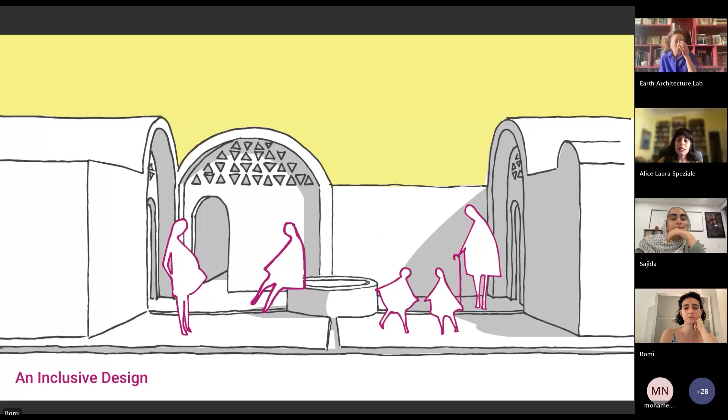Our project aims to offer a solution that allows an emergency settlement to evolve into a long-term one while ensuring respect for human dignity, cultural needs, and hygienic and sanitary conditions. Next. So, as I was saying, in our project, we are going to focus on construction and building material, earth and environment, and respect for social and cultural dimension.

So to develop our project, we started analyzing the previous proposal to try to understand how we could improve this project. So one of the main issues that we identified was the rigidity of the housing grid. And this kind of layout creates a monotonous, impersonal, and repetitive environment, which can negatively affect the residents' sense of belonging to the place. Next.

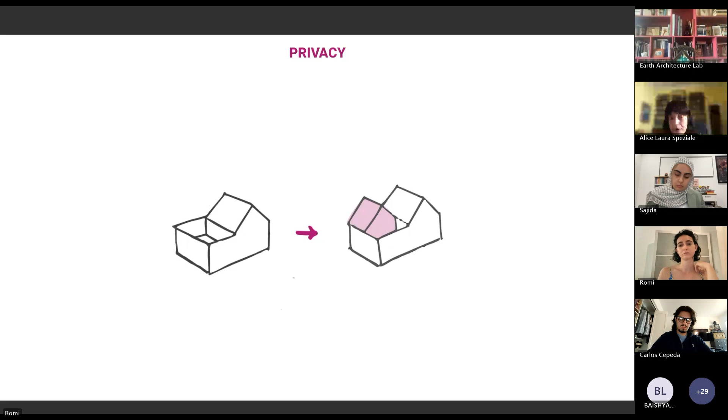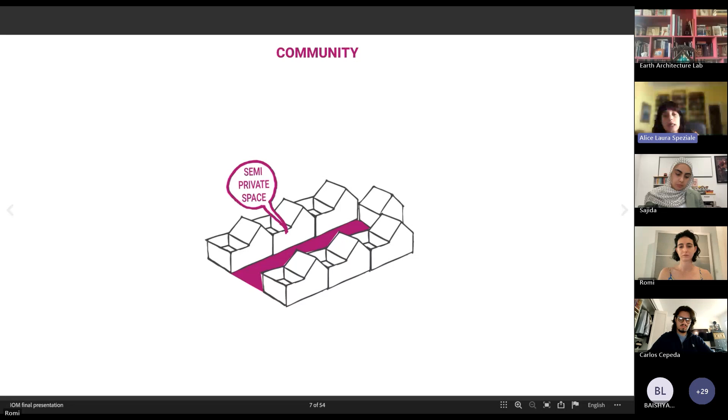Next. Also, we designed some semi-private space in which people can start to get to know each other and build up a familiar environment, which is going to be shared among a couple of shelters. Next, please. So these are the main features of our design. We are using dry toilets, a simple and feasible water drainage, a shared wall construction.

Even though last time someone of you said that many people don't like to share walls, we want to point out that these adobe walls are about 60 to 70 centimeters thick, so they will ensure enough privacy within the shelter.

Then we are designing a safe space for women, children, and elderly, encouraging rainwater harvesting. We are recycling the grey water, designing outdoor space, and also, as we will see in the master plan, we are designing some areas for facilities and social and cultural space.

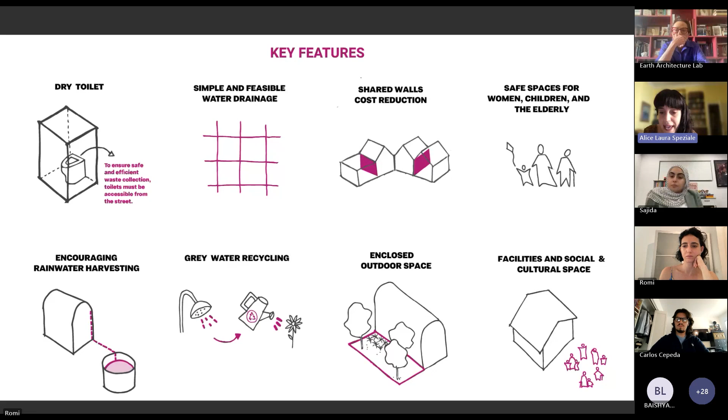For the material, we are using adobe, arch and vault. This technique doesn't require the use of wood, and also they are costless, fire resistant, and sustainable. And then we are using lime to ensure the durability of the adobe construction. So we want also to focus on training. For us, this is a very important part of the project.

We want to build with the community for several reasons. The first one is to introduce a sustainable practice in Somalia because there are too many buildings made out of concrete or CGI shelters, and also because we can empower the future inhabitants to build their own home and also create new job opportunities.

So the training part is going to be divided in several steps. The first step will be a community meeting, to explain the project to the people and also to build initial trust. The second is going to be the Dolow earth lab, in which the inhabitants are going to start to create the adobe bricks, because we know that they need some weeks to dry, and this ensures that the people get to know the construction process and know how to replicate it.

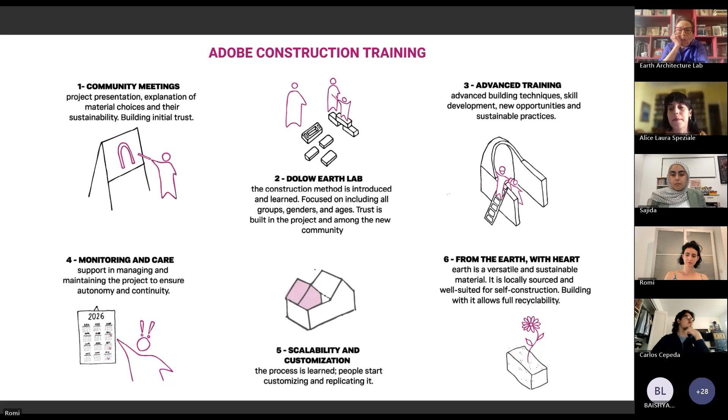So yeah, I'll continue from here. This is the shelter. It's built in a vault, like we said.

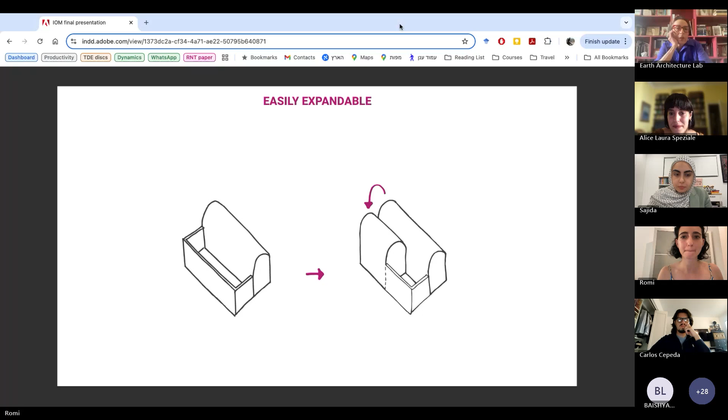Romi, can you hear me? No. Can you hear okay? No. You can try joining on your phone and just use your phone as a microphone. You really can't hear? It's very muted. Try the volume. Go with your telephone, as Saj is saying. Yeah, I'm gonna try to connect with my phone. It's gonna take just a second. I apologize for the delays. Okay, maybe while you are doing that, I can continue. I can hear you better. You can hear now? Okay, let's give it a try. Stop me if you can't hear. I'll try to speak loud also.

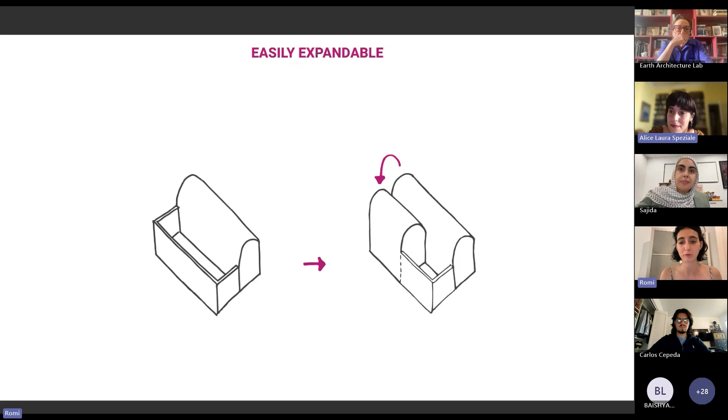Thank you. This is a basic shelter unit. It's based on the vault, like we mentioned before, with an enclosed outdoor space, which can be used as a wall base to add an additional vault whenever they want to expand the building. The vaults or the shelters are organized like this to collect rainwater from the roofs into a cistern in a shared courtyard, which is drained out into the streets in case of an overflow.

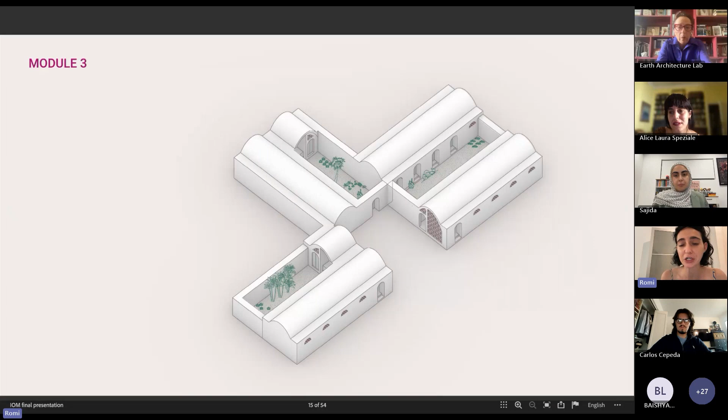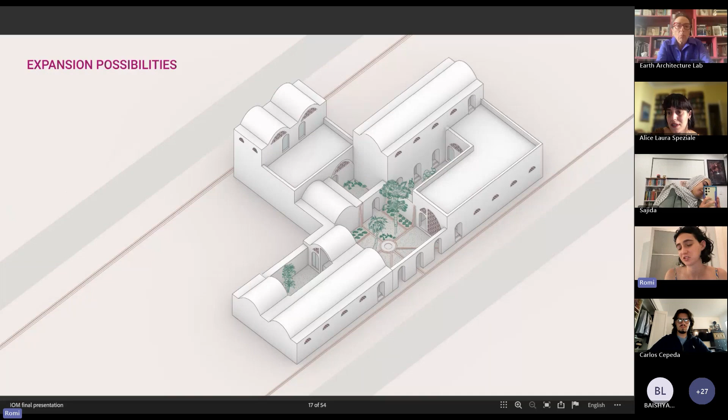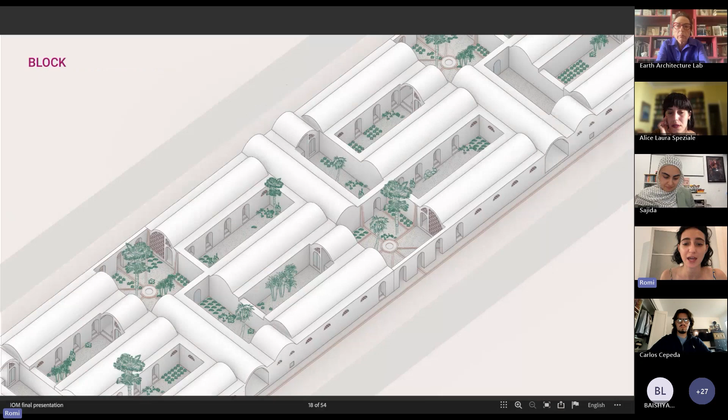Yeah, the module looks like this. 1, 2, and 3, which is a slightly bigger shelter for bigger families. They have a shared courtyard in the middle for the 3 of them, and they have their own private courtyards and their rainwater harvesting. This is just an example of expansion possibilities, how they can still keep their courtyard and add a second level or another vault, or however they choose to expand. And this is what it looks like as a block of a few clusters together.

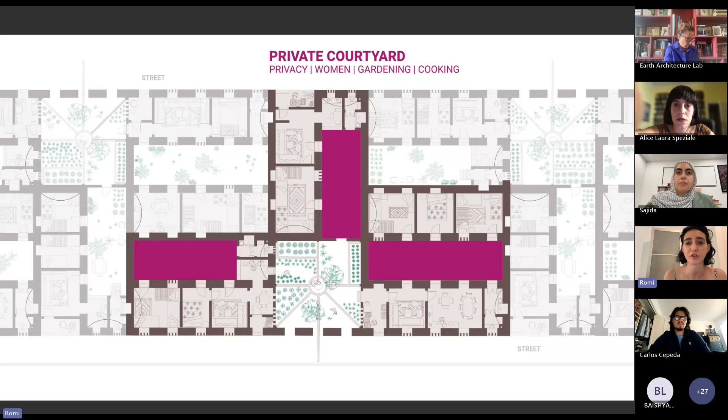The private courtyards, which they each have for themselves, are the more private spaces, more to be used by women for gardening, for cooking. And they all also have a front porch that is accessible from the main street. This porch is suitable more for the use of the men and is a potential place to start a home business that's accessible from the street.

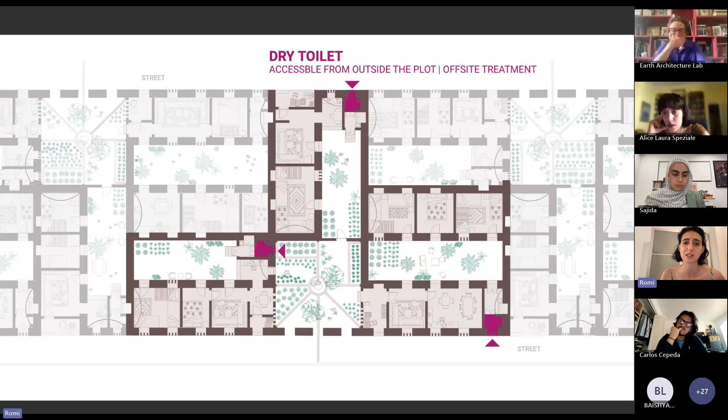Also, they all have dry toilets, which open towards the outside of the plot to allow collection of the waste and off-site treatment, so they can just come and collect it without entering the premises of the house. So there is just a small opening to the back. You'll see it later.

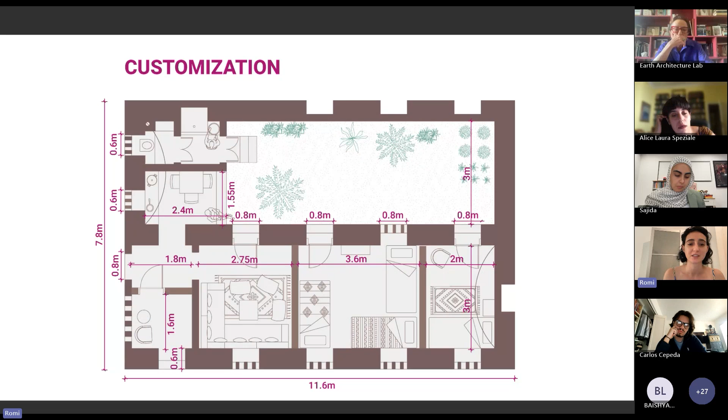The gender segregation here is also taken into consideration, where the front porch is more for the men that go in from the street. They enter the house. They usually use the main living room and maybe one of the bedrooms. And the women can go in from a separate entrance through the shared courtyard directly into the kitchen, into the closed private courtyard, and to another bedroom that's separated.

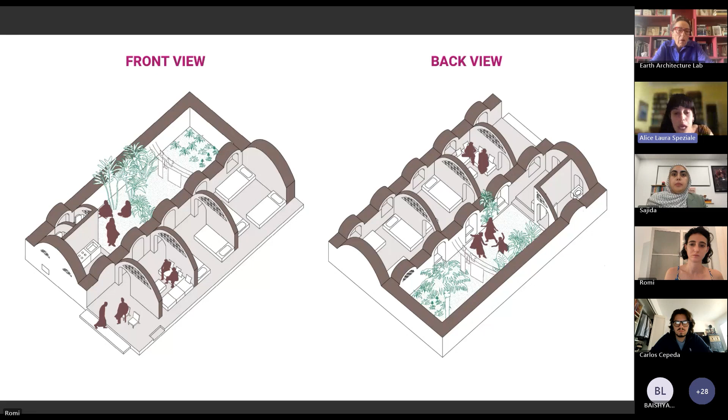Here, as you can see, the kitchen is going to be open toward the outside, and is going to be surrounded by a vault. This for us was very important because the adobe, as we already said, is fireproof, and this is very important. And also we are showing a bit of the use of the courtyard that can be used for farming, for instance.

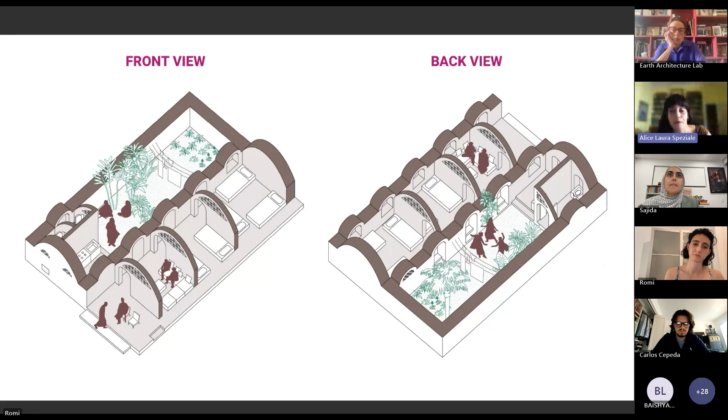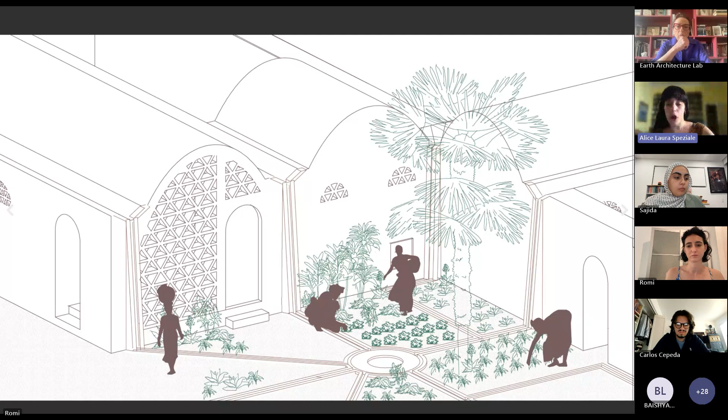Next. Also this is a view of the shared courtyard. As we can see here, this is just a proposal in how they can use this space. This courtyard is going to be shared by 3 families. So according to their needs, they can use it for farming, to have a playground or sitting areas.

Then we have this line of the rainwater collection, which is somehow dividing the space that belongs to every shelter, let's say. So there is not going to be fighting among the people, and they know more or less which space in the courtyard they have. This is just an overall view. This is going to be for us like a safe space for women. As we said before, the front porch, you can move to the other one.

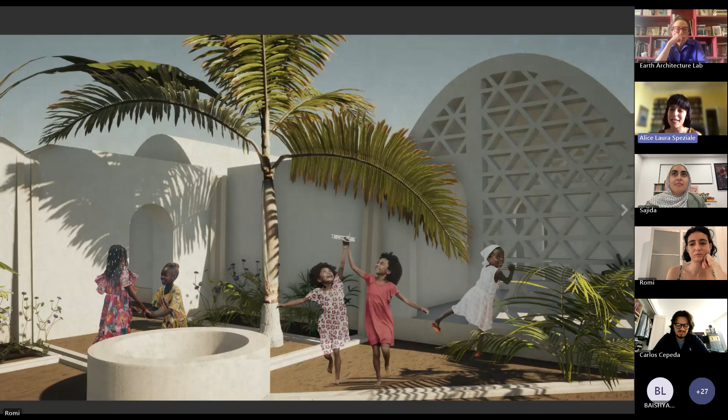Okay, the courtyard is going to be also like a safe space for kids, but not just for kids. We have also thought about people with less mobility, as people in wheelchairs, and also old people who maybe cannot walk to the main facilities, and they need a space where to socialize. And also here, the kids can play freely without the family taking care of them, let's say.

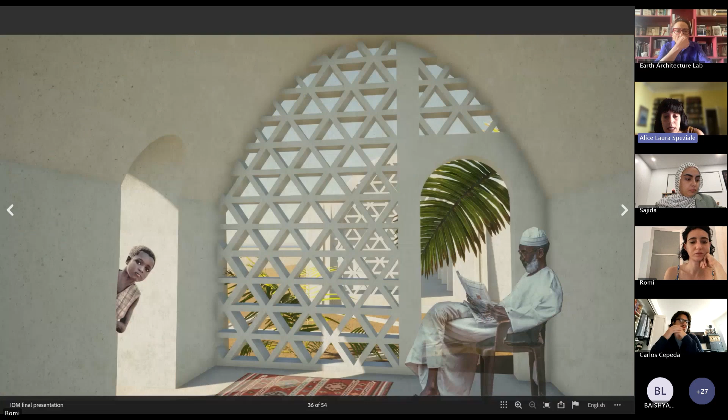Next. This is a view of the front porch. As we said, it is more related to the man, but just in the case in which the man wants to open a small retail shop, because the front porch is going to be connected to the main living room. And as we know, culturally, the living room is used by the man whenever they have men visitors. You can go next.

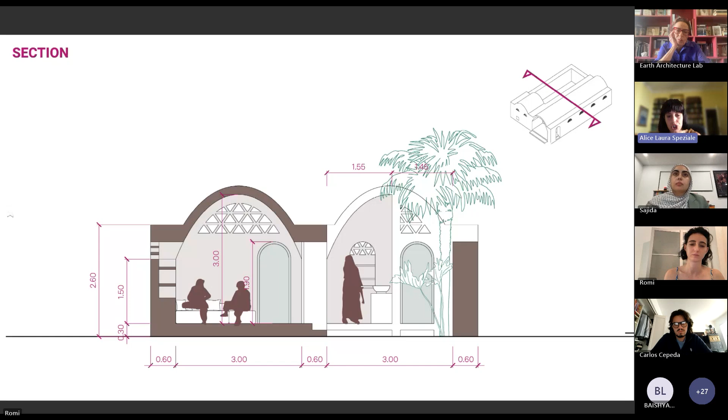Can you hear me okay? Yeah. Okay, if it's not, then tell me, and then you can just take over.

And then we found a reference of an association called La Voûte Nubienne. It is a French association which builds these Nubian vaults from mud bricks across different places in Africa. They start from the teaching and making itself, and then construction to the finalized building. We're taking as a reference some of their technical details. So for example, the mud brick itself and the sizes, which are easy to use.

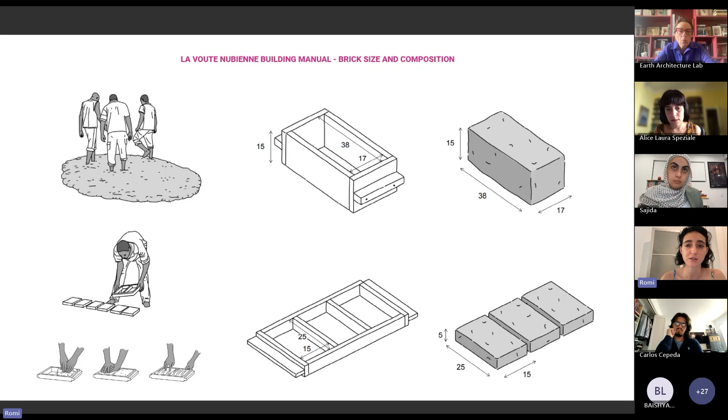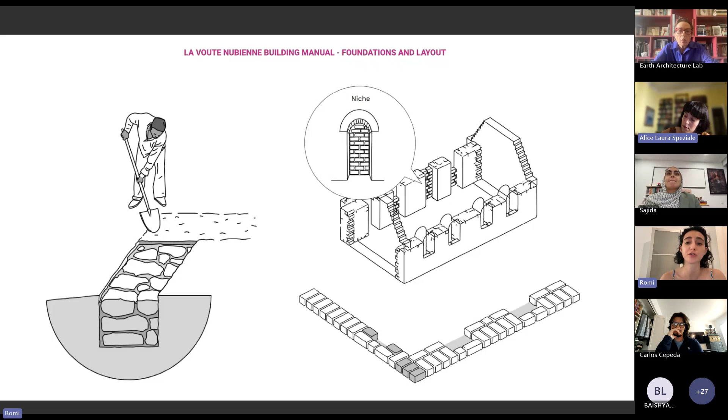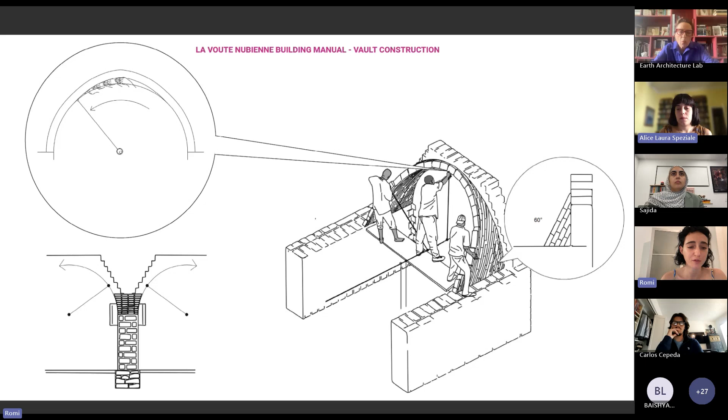Yeah, materials. I would just like to say that we introduced this NGO because we use some of their details, especially for the niche, and just for this reason. And okay, this is a section where we are showing the materials. So we have sun-dried mud bricks, which are bigger for the walls, and then smaller ones that are used for the vault.

So adobe bricks: we decided to use this material because it can guarantee a fresh environment within the shelter, and also because, as we said, it's sustainable, and so it keeps the inside fresh. We also designed some openings which allow cross ventilation, but also the warm air to go outside. To ensure the durability of the adobe construction, we use lime damp proofing for plastering the outside. And also we decided to raise up the shelter.

So we have a linear foundation made out of stones and a mortar of lime. Underneath it, there is a drainage layer made out of gravel. And for what concerns the floor, we also raised the floor. We use 10 centimeters of crushed glass, which can be used as a drainage layer. We didn't use it also for the foundation because it's less stable, and we thought that gravel is better for the foundation, but for the flooring it's okay. And then we have a slab of lime mortar.

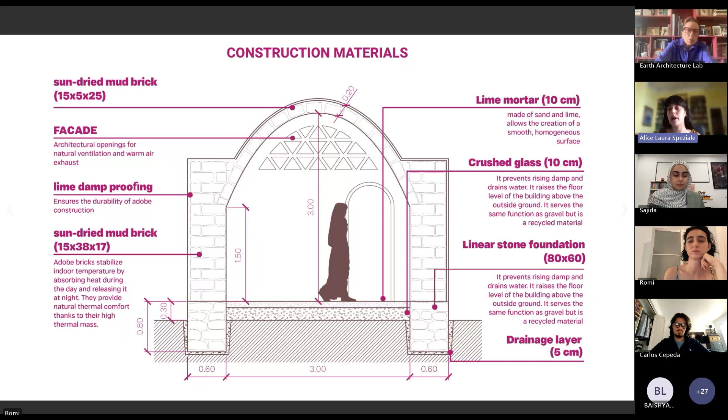And you can go next. Yeah, and also raising up the structure is very important in case of flooding. So we are really ensuring the durability of the mud brick construction. Next, please.

So here we are at the cost. The estimation of the materials is $1,600. We decided not to use the cost of the mud brick that IOM gave to us because, as explained, we thought that this mud brick should be built by the community, and with all the money that we are saving, in a second moment we can pay the work of the inhabitants. But for adobe brick, we are still considering the cost for the soil, the sand, the straw, and the water. All the prices of the materials that are marked are given by a local expert, in this case Jabir, who really helped us a lot in understanding the prices that we were missing.

And then we have the door. We decided to make the door with plywood, and then we also added some buckets. Buckets are necessary for the dry toilet, but also in an emergency state, they can be used as a sink for the kitchen and also for the toilet. Yeah, and then the training and labor.

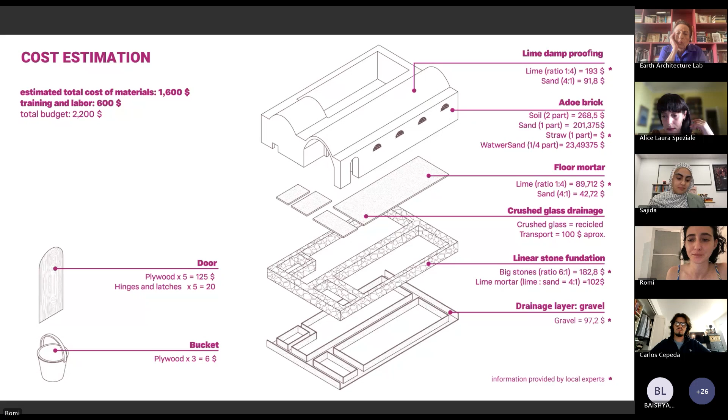Yeah, just one last thing to add to this is, the total cost of materials, like you said, is $1,600, and with the extra $600. Can't hear you, Romi. Okay. I'm saying the extra $600 is used for the training and labor costs. Can you hear? Yes, now yes. Okay. So I was saying that the extra $600 from the budget will be used for training and labor. Yeah, you can go ahead. Okay.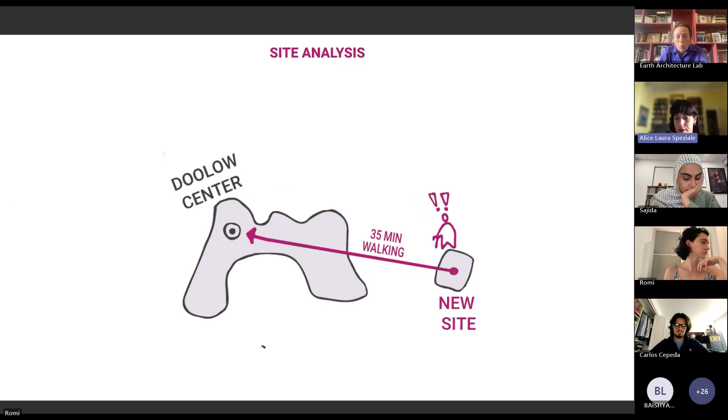So in order to develop the master plan, in this case, we are talking about Dolo, we had to analyze the site. Can you go next? So the site is 35 minutes away from the Doolow center, which is a suitable distance, but that means that we have to design some facilities within the new site. Next. So we know that there are a few facilities next to the new site, but also we decided to design other facilities that should be site specific. Next, like a recycling center, a community center, a mosque, a retail shop, school, kindergarten, and senior center.

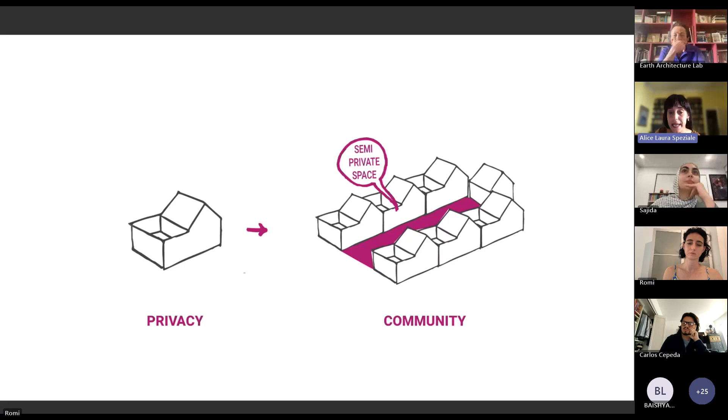Next. Yeah, so with our design, we are trying to avoid this rigid grid design, as we will see. Next. And then there's going to be a sequence of private space, semi-private space, and community space, as we can see from this sketch. Next. Yeah, so this is the site plan. Alice, I don't know if you hear me well, maybe you can explain.

Okay, so yeah, this is the Doolow site plan, which is the site that we initially planned for. You can see the layout of the clusters together. We have a main central area in the center. If you notice, the lowest point in terms of topography is right in the center there, where we decided to keep an open green area because this is where all the water will accumulate eventually, and we want to avoid flooding. There's also a mosque in the center, and community centers, which could be used as classrooms, as play areas, as workshops, and so on.

There are a few water points, main water points spread across this area, which you can see as the small blue circle, the light blue circle, and at the entrance of the settlement, there is a place for a market, which is accessible also from the main road from outside the settlement to allow trade with people who don't live there also, and of course administration,

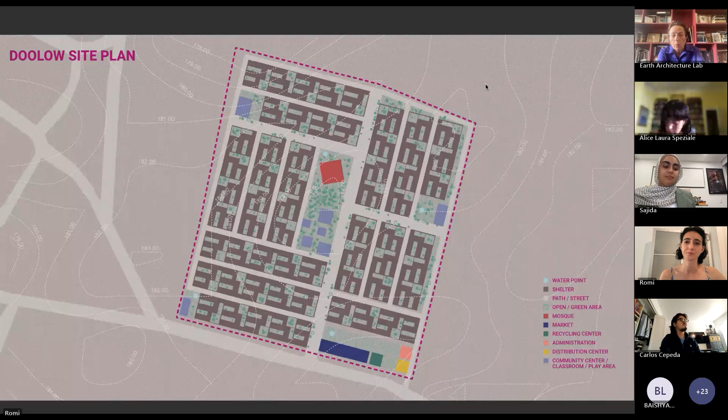Thank you, guys. Romi, if you can stop sharing your screen, maybe, so I can share mine. I think I stopped. Yep. Carlos, do you want to do it or do you want me to do it? I can do it. Okay, cool. Otherwise, do you want me to do it? No, it's okay. I was just prepping my screen. So I thought I was doing it. Go for it. Very good. I have it. Can you see it? Yes, right. Cool. Menu, view, full screen mode. You can see it, correct? Very good. Great, let me just move this to the side. Cool. You ready, Saj? Yeah, go for it.

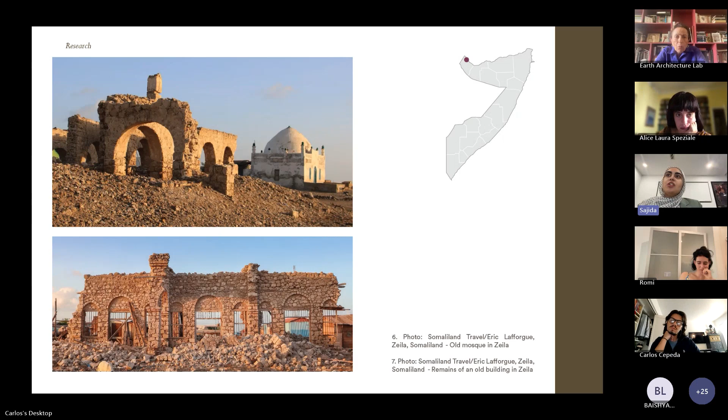We focused on this rich history of mud brick architecture, from the old mosque in Zeila to the Italian-era mud brick camps near Mogadishu. Somalia has significant precedents of mud brick housing and civic buildings, from the fortresses in Bosaso to intricate mud brick neighborhoods in Berbera from the Ottoman times. And recent precedents include work by Abdel Fahmi in Burao, and of course the IOM IDP housing in Doolow since 2022, indicating a rich history of adaptable craftsmanship.

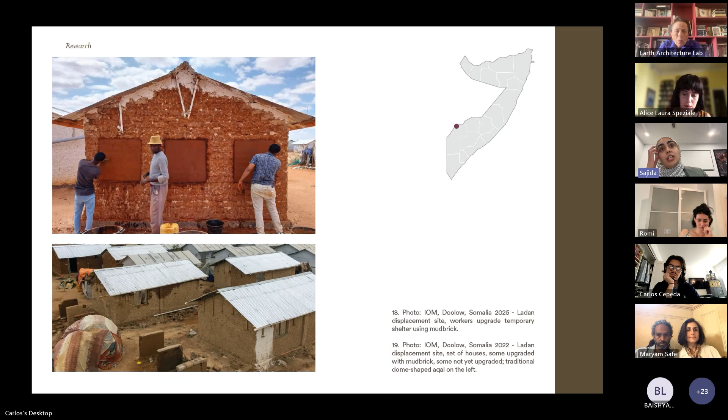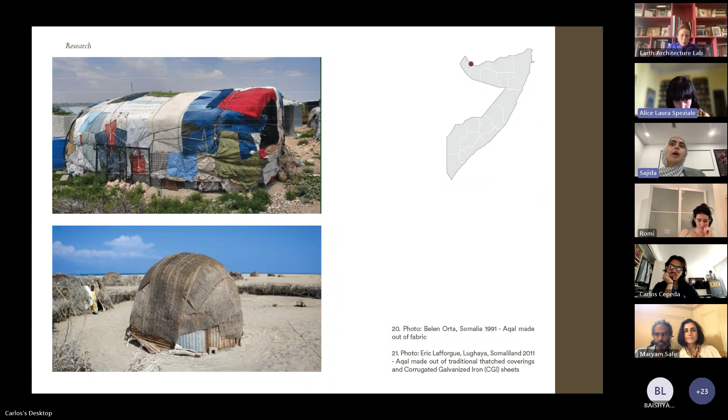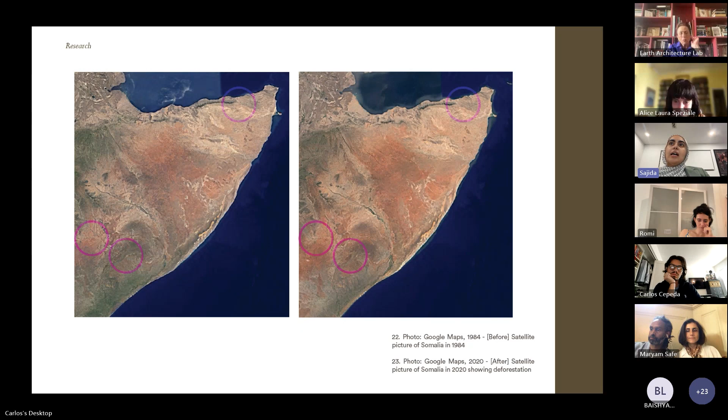This adaptability is seen in modern aqals as well, switching traditional thatch for fabric and also metal sheeting in more recent times. Exploring Somalia's social and environmental conditions, we see that after decades of conflict and economic hardship, the land has been intensely deforested. Today, Somalia's landscapes are bare due to human mismanagement and climate change, and this is especially evident at our sites where internal displacement and rapid urbanization have caused severe environmental degradation.

Knowing Somalia's morbid history and environmental crisis and the IOM's limited budget, we don't propose an architectural project. We are proposing a whole system of mud brick and permacultural education to create self-sustaining communities. As such, we can start imagining an IDP family. Architecturally, we give them the ability to be their own architects, capacitating them with classes by masters like Hassan Fathy did in Santa Fe in the 80s, for example. Then these locals are trained and capacitated as a community.

Thus, we cut the middlemen, allowing them to build homes for their individual needs, and eventually pass this same knowledge to other generations of Somalis, who can then spread these building skills well beyond just Baidoa, Bosaso, and Dolo, whether they go back home to where they're originally from, or they decide to move or are displaced somewhere else from these camps that we're designing.

Similarly, those same IDPs could be educated to farm regeneratively, like what the Food and Agriculture Organization is doing with the Great Green Wall of Africa project in places like Senegal, for example. Thus, learning how to reinvigorate the land, bringing their knowledge back home to their communities, and eventually spreading these skills around even if they face displacement again. In this way, we're building capacity within these communities to bring regeneration throughout Somalia and not just the sites in Baidoa, Bosaso, and Dolo.

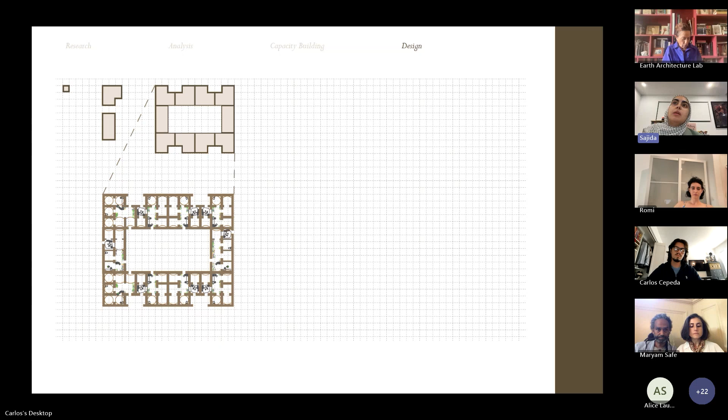Our system is simple. We start with a basic unit of 3 by 3 meters, replicate into 72-square-meter shelters, which make up clusters with semi-public courtyards and adaptable settlements. This grid allows planned rigidity by limiting each unit's footprint while offering flexibility for the trained IDPs to customize their spaces with vaults, domes, and courtyards as they choose and need.

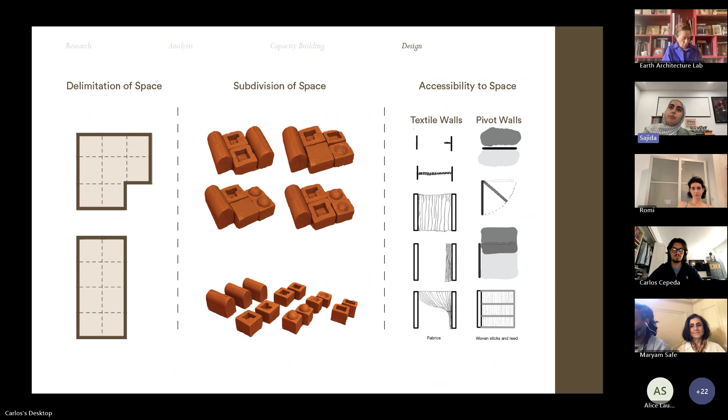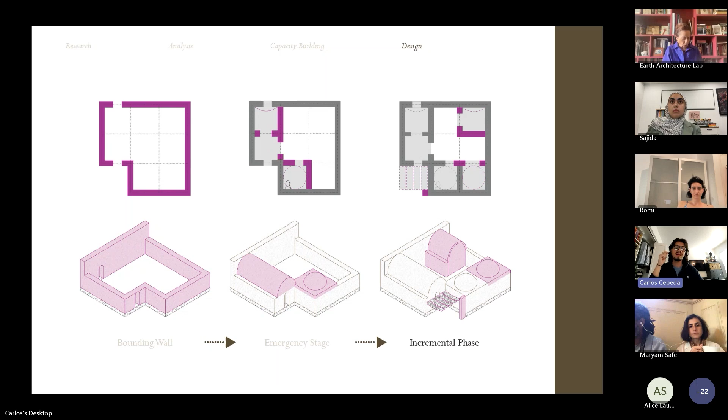One rigid bounding wall allows for an initial emergency shelter that can eventually become a full self-made home, adaptable to each family. Different stages, but one single goal: dignified living for all IDPs and Somali population within the country.

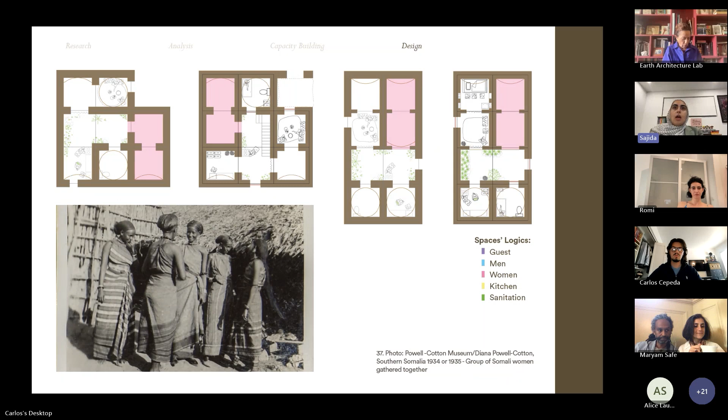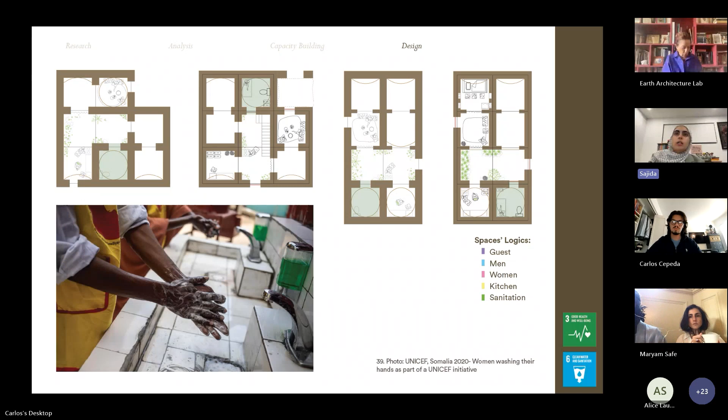Following Somali traditional domestic formalities, our logic adapts to front-facing guest spaces that might become men's living quarters at night, while giving women private areas all day long. Kitchens can range from internal to outdoor depending on family preference, and sanitation facilities can be accessed through the courtyard, keeping toilets outdoors but within the boundary of the home.

So we have... one rigid— oh sorry, no, Saj, it's your turn. Go for it. Continue.

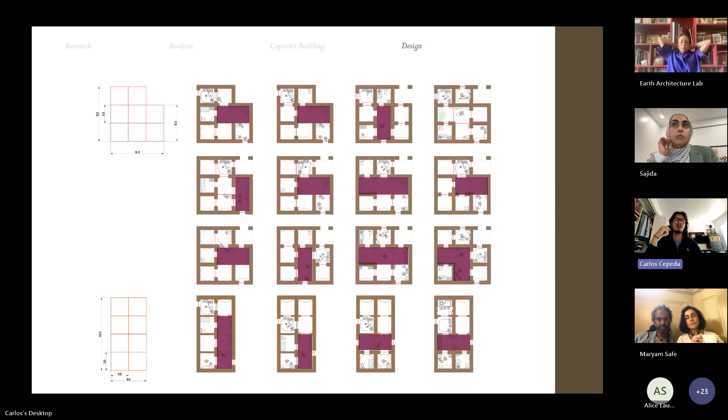So it's one rigid grid and one hyper-flexible layout. This encourages spatial customization by the IDPs themselves, depending on what each family needs, giving them the capacity to choose what these necessities are, and allowing IDPs agency over what's best for them instead of us assigning what we think they need.

So instead of a one-solution-fits-all shelter that generalizes every family's background and needs, our system gives agency to families to make homes as they have been doing historically. Our system incites dignity through adaptability.

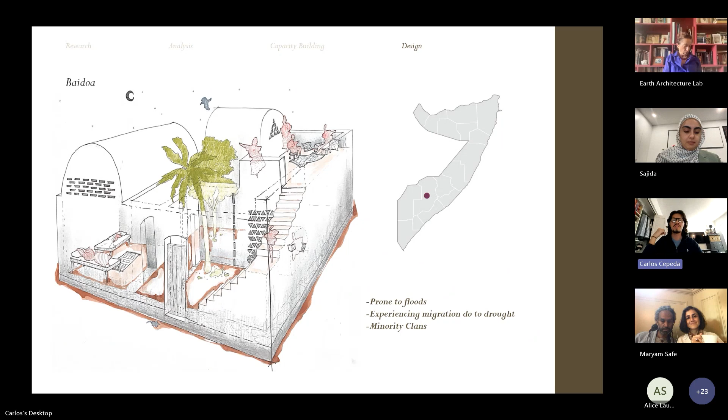And we can see that in the next three cases that we're going to put together now. Our case in Baidoa faces seasonal flooding with IDP groups displaced by drought, many of whom are from minority clans.

For the Baidoa scenario, we envision a family—let's call them the Mohammed Abdi family. They have a hybrid inside-outside kitchen and subdivisible front rooms for guests. No one in their family has a disability, so they add a second floor terrace. They are from a minority clan and prioritize outdoor private space.

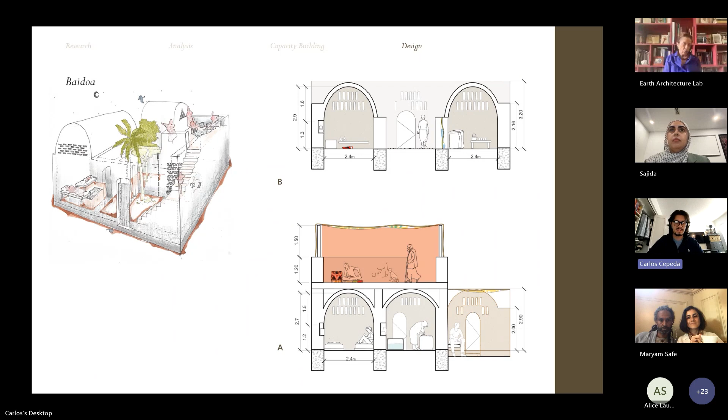Bosaso is an arid commercial coastal city facing many IDPs in fear of displacement due to land tenure. Here, the Amr Yusuf family is of a pastoralist background. They don't like the idea of an interior kitchen, so they build a fully external kitchen in their courtyard.

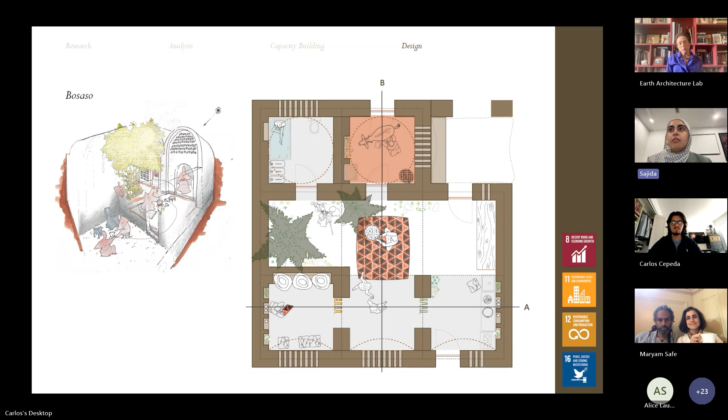Despite losing most of their herd, they still have some goats, so they segregate a pen within their home. They also plant some palm trees and frankincense in hopes of generating additional income.

In Doolow, for example, a community on the border with Ethiopia, flood-displaced riverine communities might temporarily move but need water-resilient infrastructure. Maybe it is the Abdullahi Noor family, who are mostly women and have a long lineage of healers and midwives.

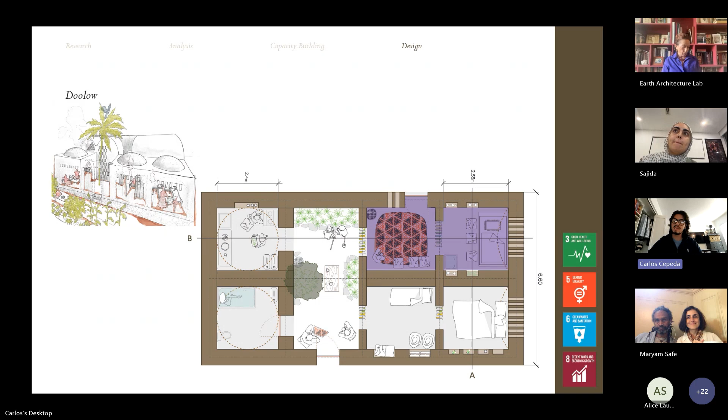Their kitchen, garden, and living rooms become temporary medical spaces during the day and living and sleeping spaces at night. They use their front guest space for medical visits during the day, and their courtyards to grow medicinal plants like aloe, hadi, and dakar to treat patients.

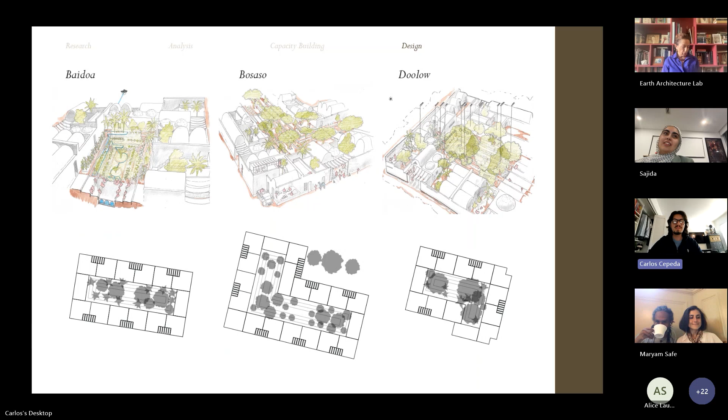The units can be assembled in different configurations to adapt to the necessities of different communities. Through this section, we can see how the street elevation brings rainwater toward the houses, where pipes use gravity to guide the water into the courtyards, where it winds and filters into the soil, allowing for variable ground conditions for these plants.

This long pathway allows water not only to reach plants but to percolate into local aquifers where it can later be extracted. What does not seep into the ground gets filtered into underground water storage for irrigation purposes.

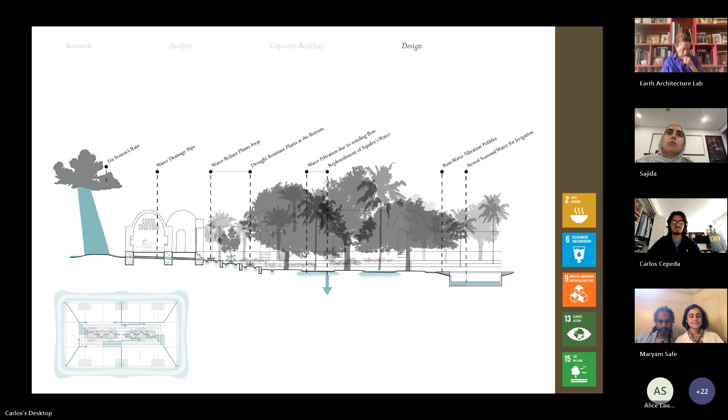This system is apparent in Baidoa, a flood-prone city where historically ostracized minority clans, like the Somali Bantu or the Gabooye, seek private communal spaces. Because of the stepped landforming for irrigation, the center of a cluster can become a clan meeting space as well.

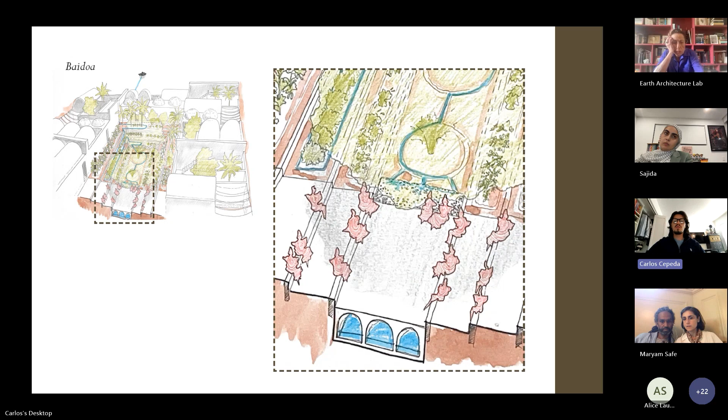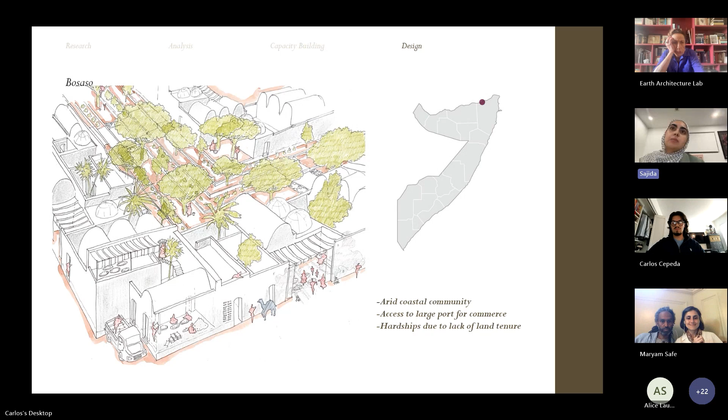Thus, atop the water storage, you might see a monthly formal clan meeting, for example. In contrast, in Bosaso, where it tends to be very arid, a community might decide to use their courtyard as an economically productive space, choosing to grow native frankincense, which is also very profitable.

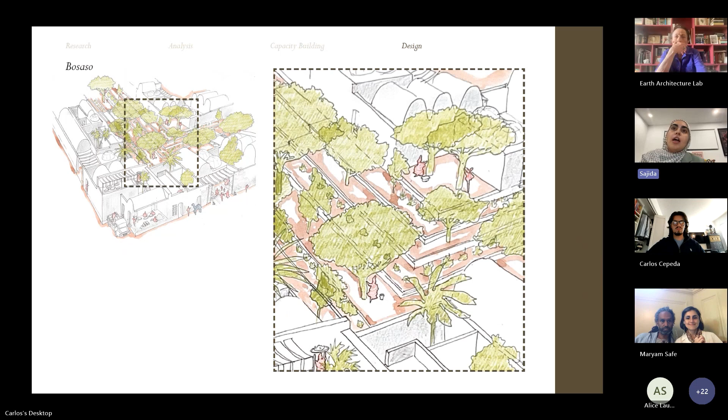Here, they decide to utilize the workshop in their cluster to commercialize their harvest. They treat and process it here so they can maximize on the nearby international port to sell their products, while also profiting locally under the public fabric verandas.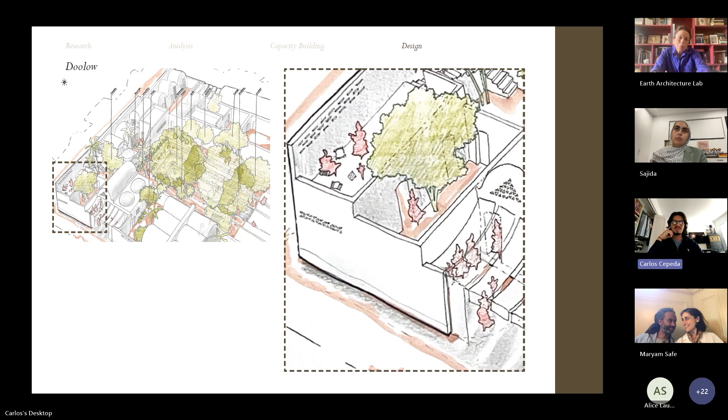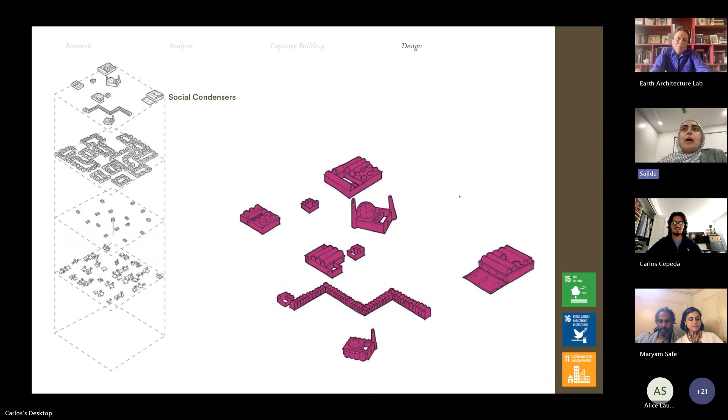But it can also become just exterior public space when there's no one waiting in line to enter these medical spaces. This interplay of rigid boundaries with flexible possibilities also translates at the urban level. Our grid sees social condensers like mosques and souks as nuclei for the community, where clusters of homes surround them. The water collection system then flows beneath, and the permacultured green spaces start to sprout in between, creating a system for the IDPs to decide what they need in their own settlements.

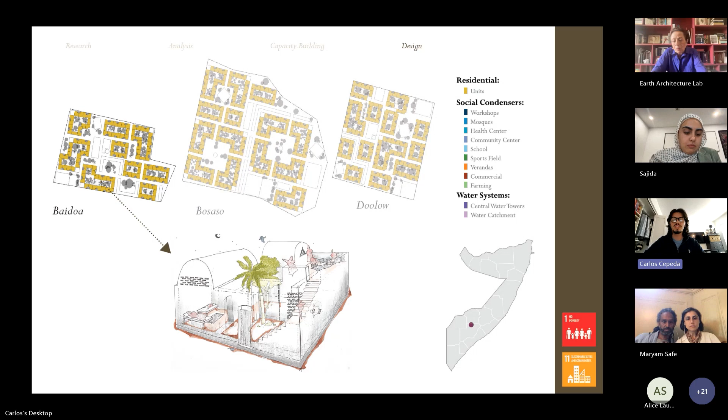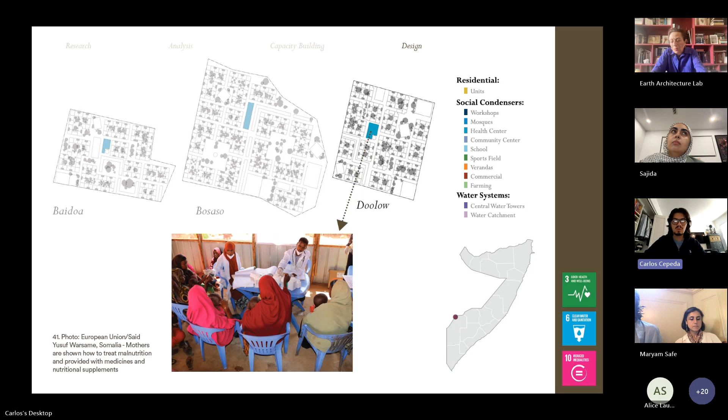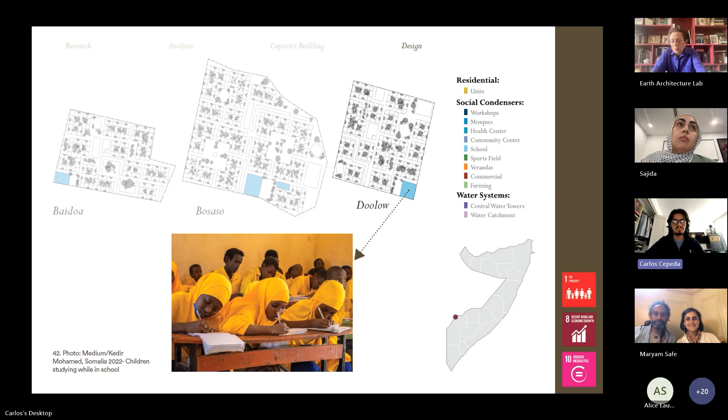The fabric verandas create spaces to socialize, rest, and carry out informal commerce, while souks are formalized trade spaces. Farming can extend beyond the clusters and courtyards into public spheres.

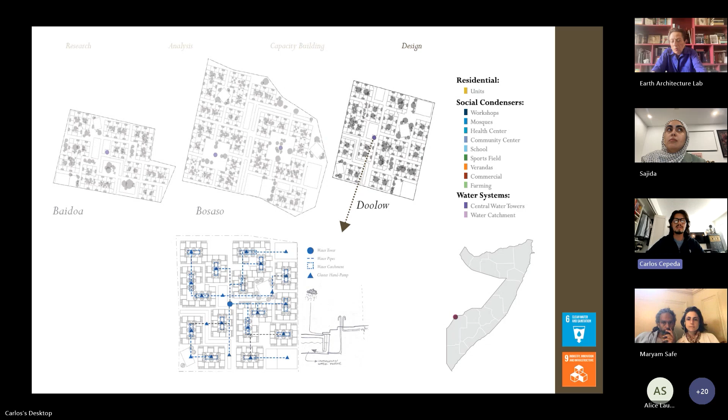We also propose central water towers to pump drinking water from aquifers into the faucets of the cluster's semi-private courtyards. This means that water is accessible by a limited amount of people, and thus people don't have to go into public space, minimizing safety risks.

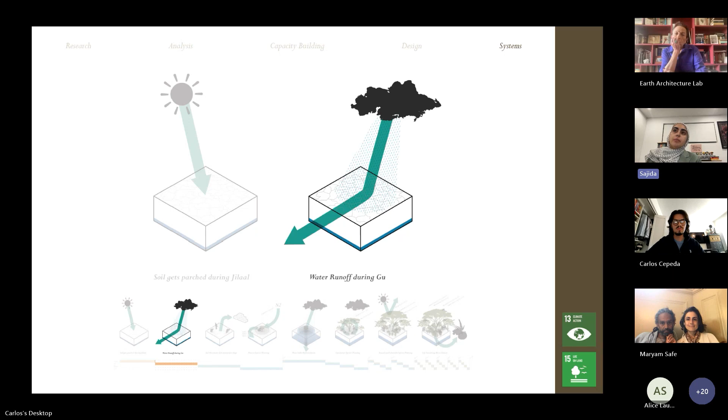The water pumped out of the aquifers would be replenished through the permacultural processes of the courtyards that Sajida mentioned earlier. Our system considers the earth conditions around Somalia. Usually the earth is sunbaked during Jilaal, making the ground water-repellent during the Gu season. So we proposed breaking the ground.

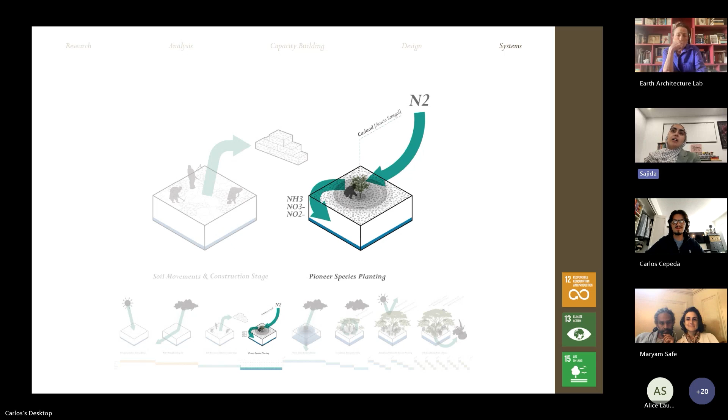Oxygenating it while we gather the mud brick material. This allows for endemic pioneer species like Chaddad to rehabilitate the soil by reintroducing nitrogen into the ground. This breaking of the ground, along with the root system of these plants, allows for aquifer replenishment, and it creates conditions for enrichment species like Yeheb and Bers to grow and breathe life back into the ground.

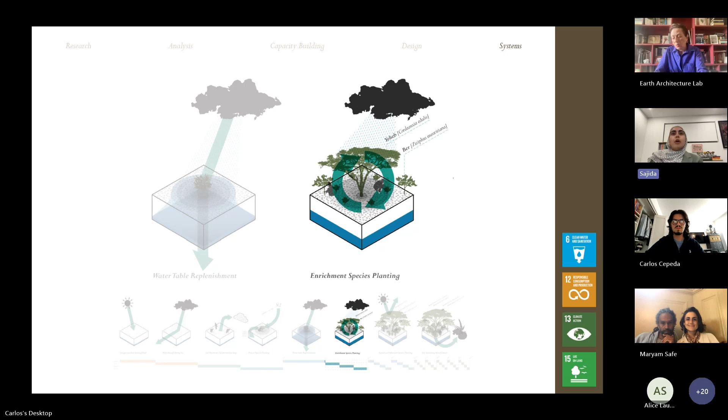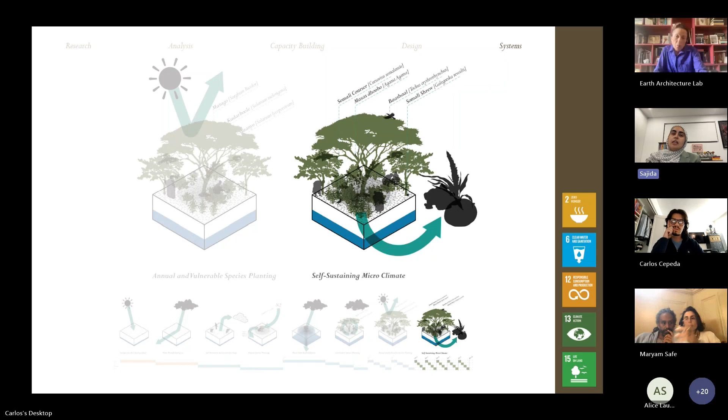These plants allow, with time, for growth of annual species while ensuring long-term self-sustaining microecosystems. With the excavation of the streets and the interior courtyards, we can collect enough earth volume to create not only emergency stage housing shelters, but fully functional, dignified homes.

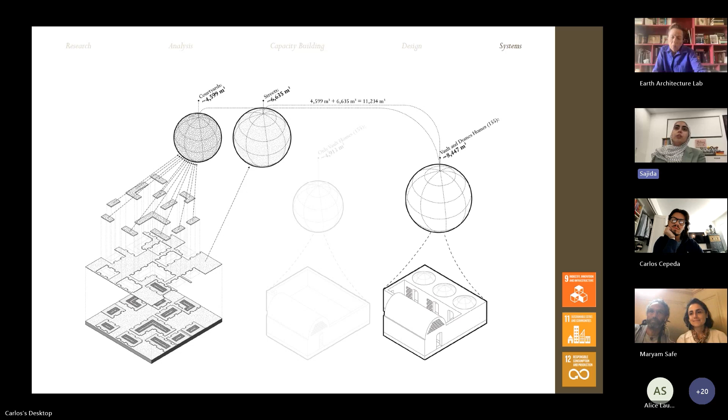And depending on the site, oh— Sorry, should I go? Yeah.

You're good. Depending on the site, the soil of Doolow, Baidoa, and Bosaso can be enriched to reach optimum mud brick strength. Our buildings would be damp-proofed using Salma's damp-proofing manual techniques, with a first layer of Magda, followed by a layer of Tarka, then covered with Sarush, then a layer of Kasha, and finished with a diluted lime wash, Rashasha.

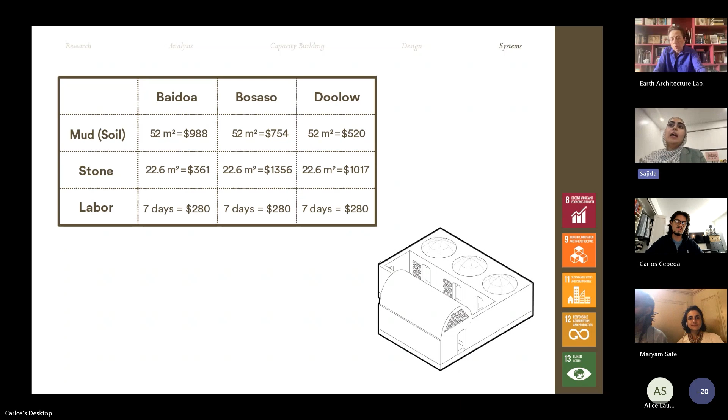And based on the IOM's pricing list, all the soil needed for the mud brick would be approximately $1,000, if not less. The cost varying from site to site, but more importantly, if we also pay the IDPs for 7 days of labor at $40 a day, each unit will average at less than $2,000 per unit.

And this is not considering that we will source a lot of the soil, if not all of it, from the excavated landscape, as well as some of the stones for the foundation. So this process is circular. That means that all the ground movements we create for the interior courtyards and the topography of the streets is the same material we would use to make the mud brick that will go into the houses. And it will eventually go back to the earth. Correct. Yeah, after time, it can go back to the earth.

So Hoi proposes physical implementations like architecture by enriching local capacity with education and land stewardship, allowing for regenerative cycles of care based on value systems of self-reliance and adaptability for both the people and the earth alike. We are betting on the historic capacity of the Somali people, IDPs alike, to be resourceful and resilient, uplifting each other, their communities, and their land.

This, of course, would not be possible without partners like IOM, the Somali government, Earth Architecture Lab, and even other UN entities like the World Food Programme. Hoi is about systems of reliance and about care and dignified living. If we invest in the people today, they will create spaces and places to return to tomorrow.